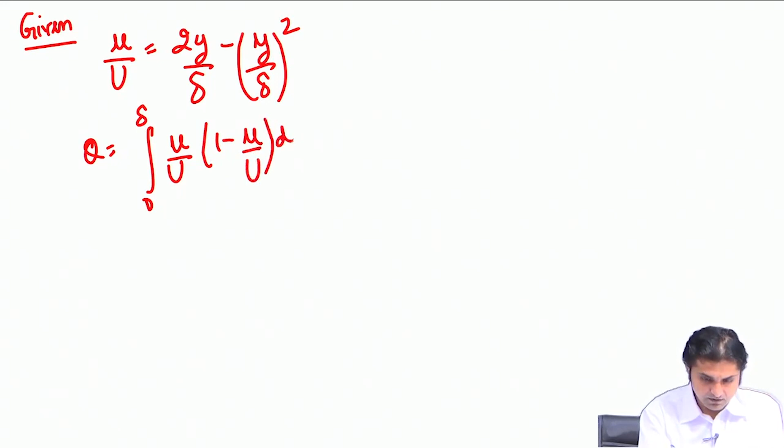So what is given is u by capital U equals 2y by delta minus y by delta whole square. Therefore, the momentum thickness can be written as the integral from 0 to delta of u by capital U times 1 minus u by capital U dy. This is the definition of momentum thickness.

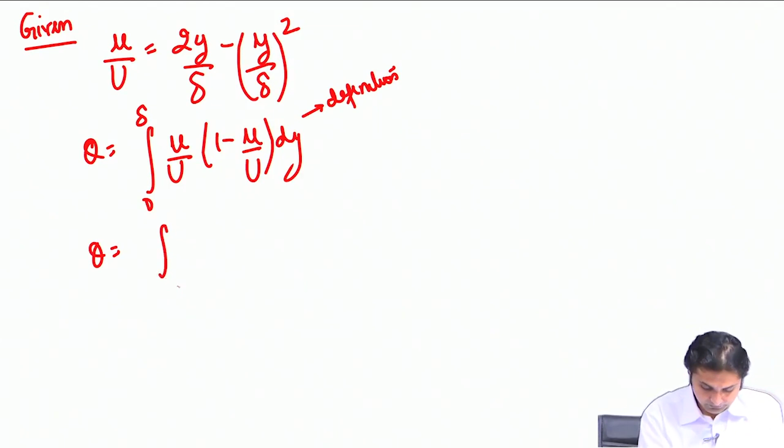So it becomes 2y by delta minus y square by delta square, into 1 minus 2y by delta plus y square by delta square, dy. The momentum thickness is the integral from 0 to delta of 2y by delta minus y square by delta square minus 4y square by delta square minus y to the power 4 by delta to the power 4 plus 4y cube by delta cube, dy.

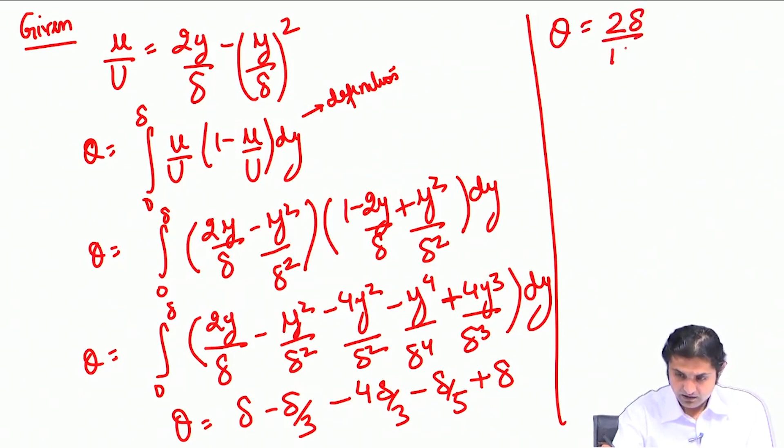After integration and substituting the limits, the first term gives delta minus delta by 3, minus 4 delta by 3 minus delta by 5, and the last term gives delta. Therefore theta, the momentum thickness, is equal to 2 delta by 15.

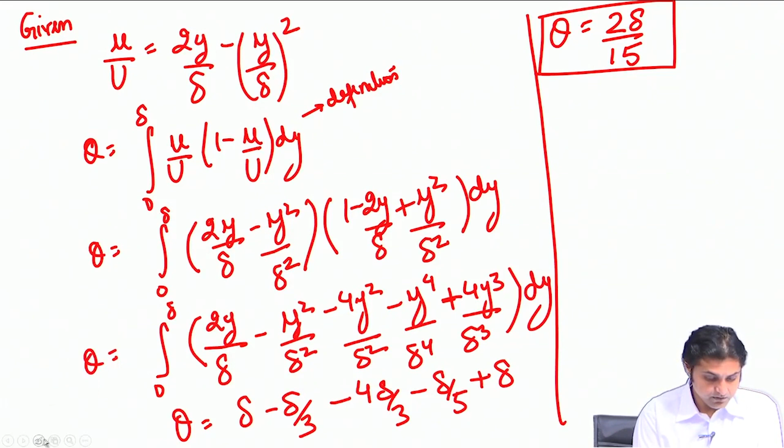We proceed to the next page to solve further. We had got theta equal to 2 delta by 15.

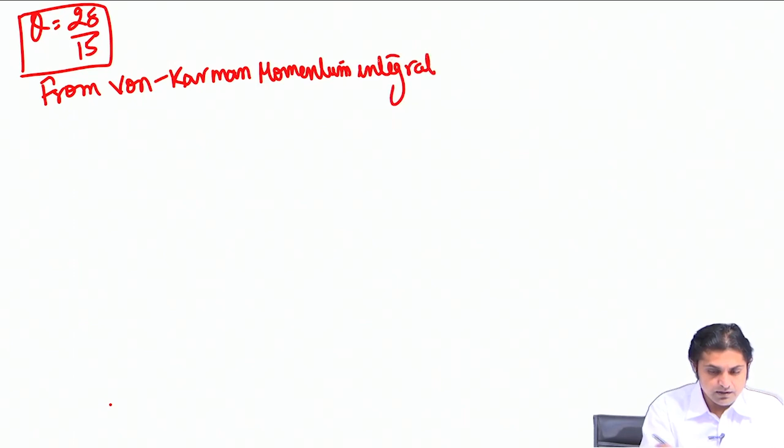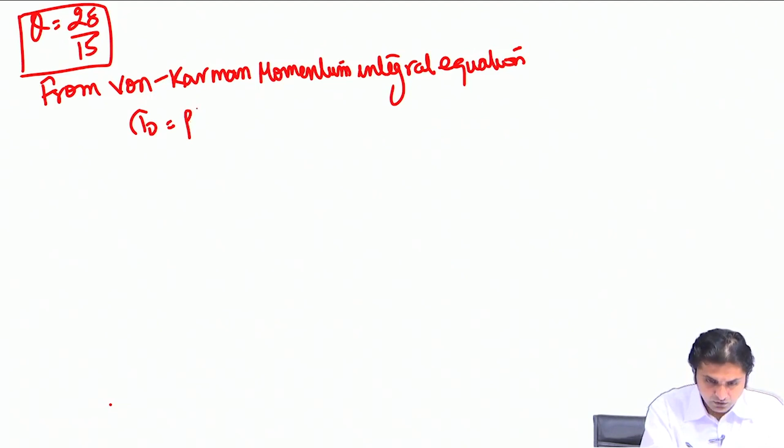Now from the von Karman momentum integral equation, tau naught is equal to rho capital U square d theta by dx.

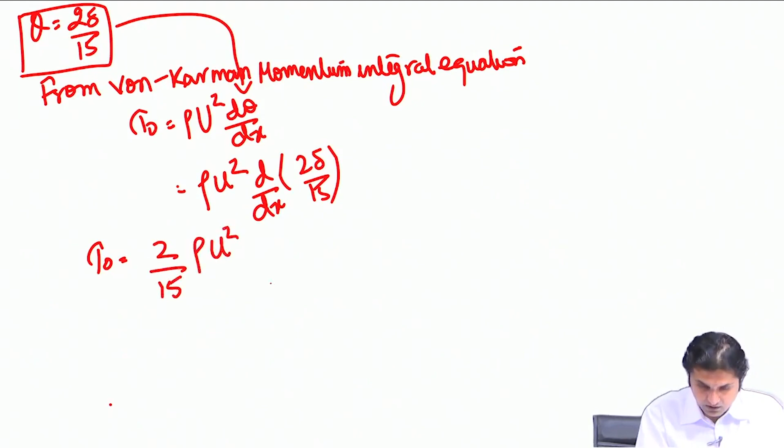So we have rho U square, and we put theta as 2 delta by 15. So d dx of 2 delta by 15. Therefore tau naught is equal to 2 by 15 rho U square d delta by dx, and this is equation number 1.

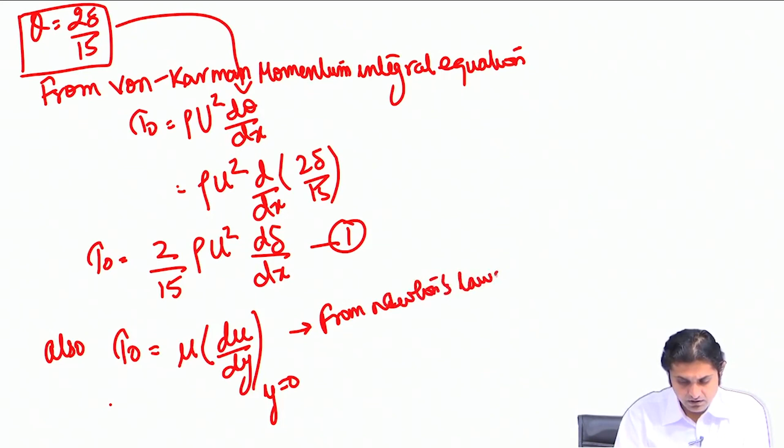Also, tau naught can be written as mu du by dy at y equals 0. How do we get this? From Newton's law of viscosity.

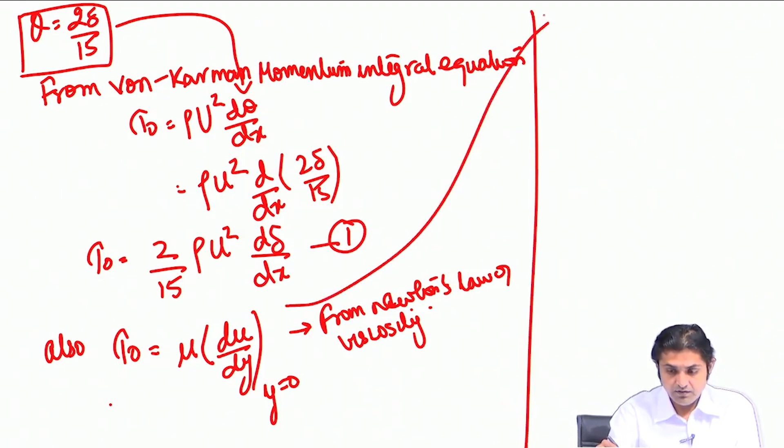The velocity profile we already know, u by capital U given in terms of y and delta. From here, tau naught can be written as mu times du by dy, which becomes 2 capital U by delta minus 2U by delta square into y, at y equals 0. The second term goes away when we substitute, so it becomes mu times 2U by delta. This is equation number 2.

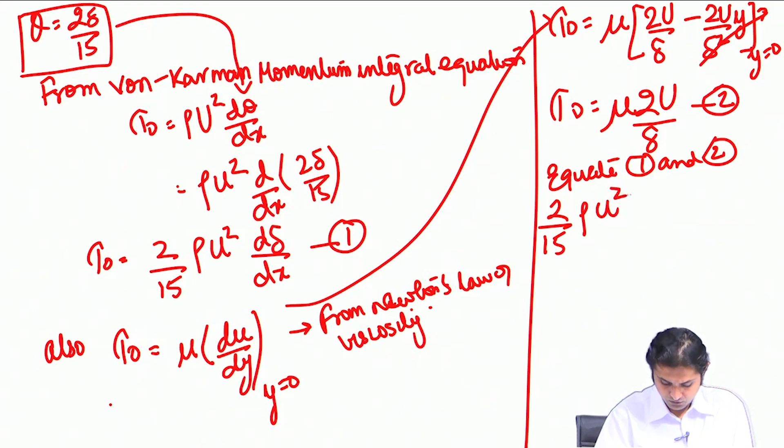Equate equations 1 and 2: 2 by 15 rho U square d delta by dx is equal to 2 mu U by delta. This is the equation that we get.

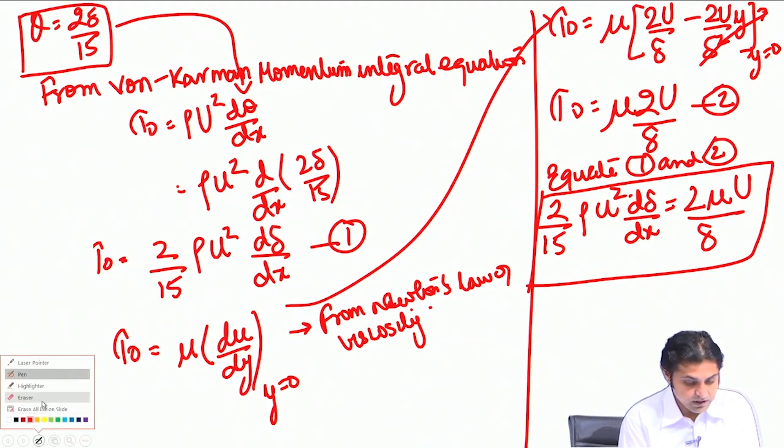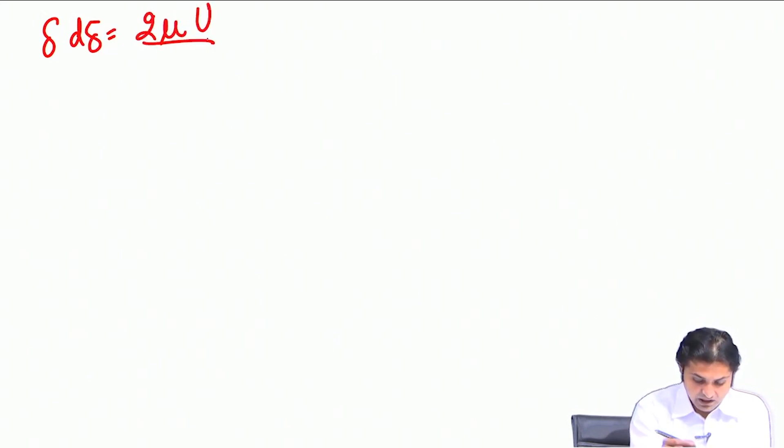Now to find delta, we must simply integrate it. We will do this integration on the next page. It goes like delta d delta equals 2 mu U, divided by 2 by 15 rho capital U square dx. Rearranging, this becomes delta d delta equals, and one U gets cancelled.

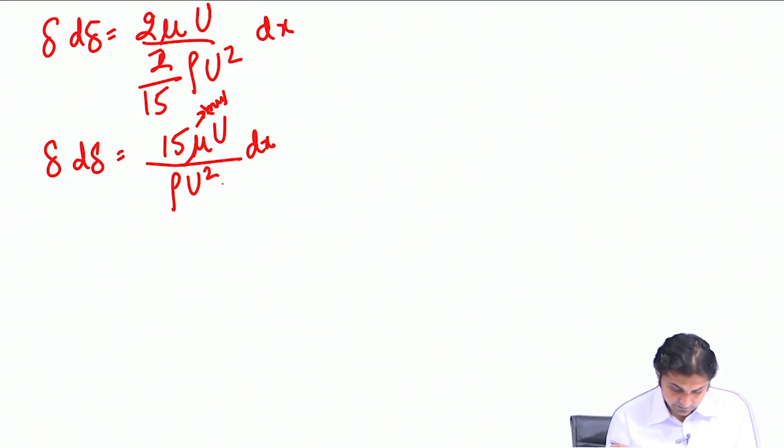This is mu, this is mu, into rho U square dx. So d delta, with U cancelled, becomes 15 mu by rho capital U dx, and then we can integrate.

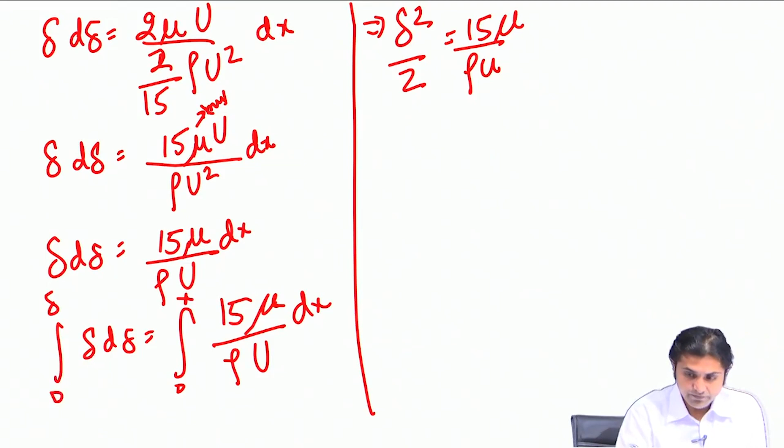We integrate delta from 0 to delta, and x from 0 to x: 15 mu divided by rho capital U dx. After integrating, it becomes delta square by 2 equals 15 mu divided by rho U times x plus c, where c is the constant of integration.

But how do we obtain c? We know that the boundary layer thickness at the leading edge is always 0. So at the leading edge, x is 0 and delta is also 0. Substituting this into the equation, we get c equal to 0.

Therefore, we can simply say the boundary layer thickness: delta square by 2 is equal to 15 mu times x by rho U.

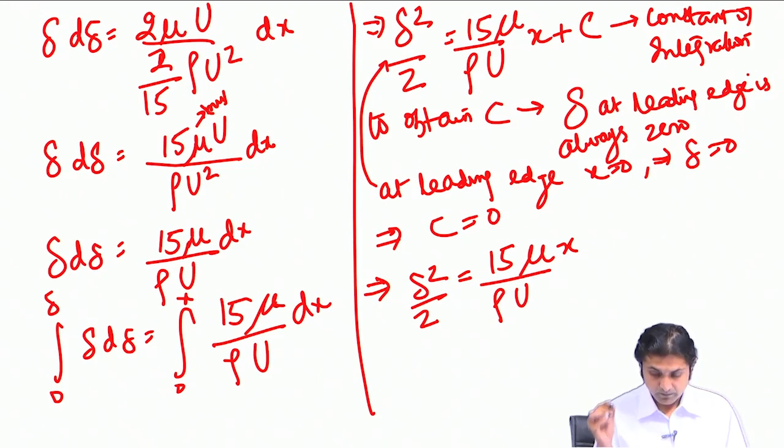To simplify, the left hand side will remain the same. If you divide mu by rho, this becomes nu. Multiply with x on numerator and denominator, and this term is written as the Reynolds number at a distance x.

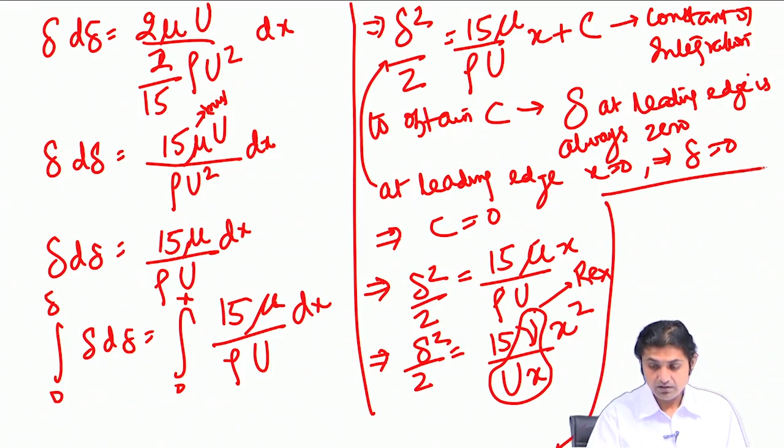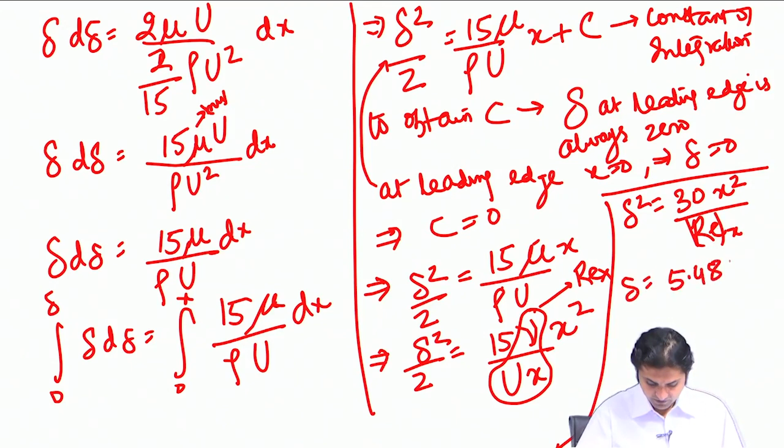So I will conclude here. Delta square can be written as, taking 2 to this side, 30x square divided by Re x. Or, taking the under root, 30 becomes 5.48x divided by under root of Re x.

So this is our first answer, the boundary layer thickness. Now for the second part, I will erase all the ink.

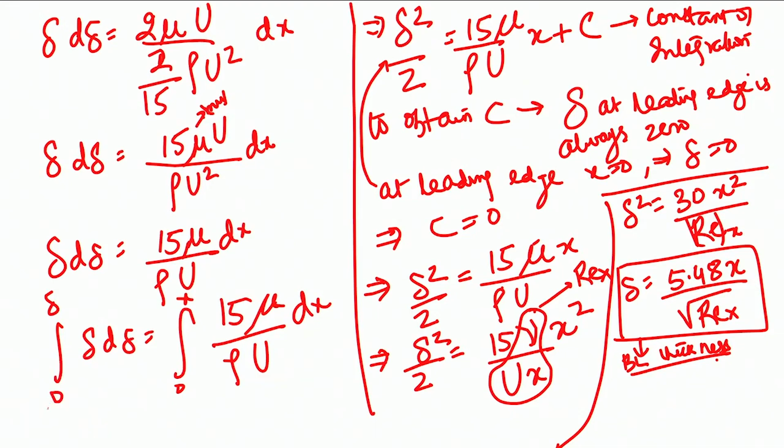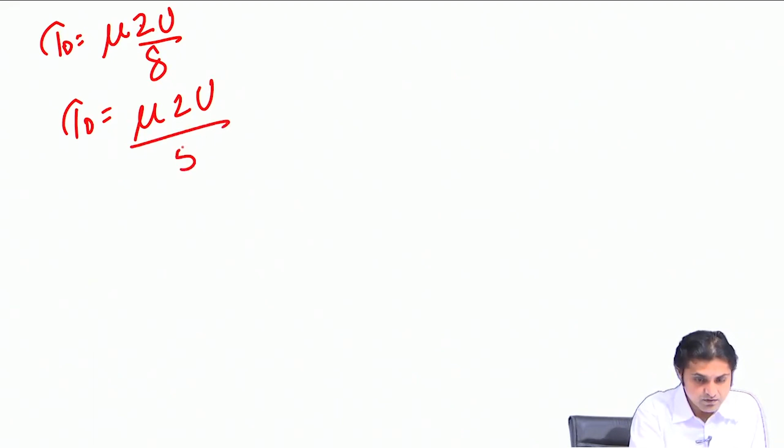For the second part, we know that tau equals mu times 2U by delta. It's just a matter of substitution. Tau naught equals mu times 2 capital U over delta, where delta is 5.48x under root Re x. So tau naught comes out to be 0.365 mu capital U by x under root Re x.

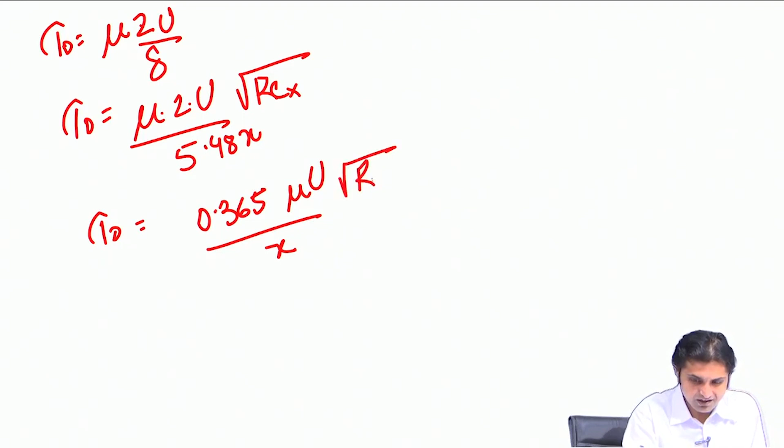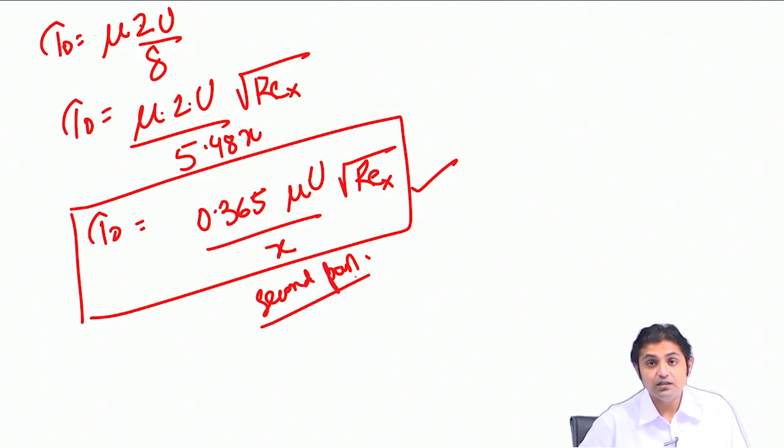After finding that, you can express it in any form you want. So this is the second part. It was a long question, but it clearly showed how we can use the von Karman momentum integral equation to find the boundary layer thickness. Good.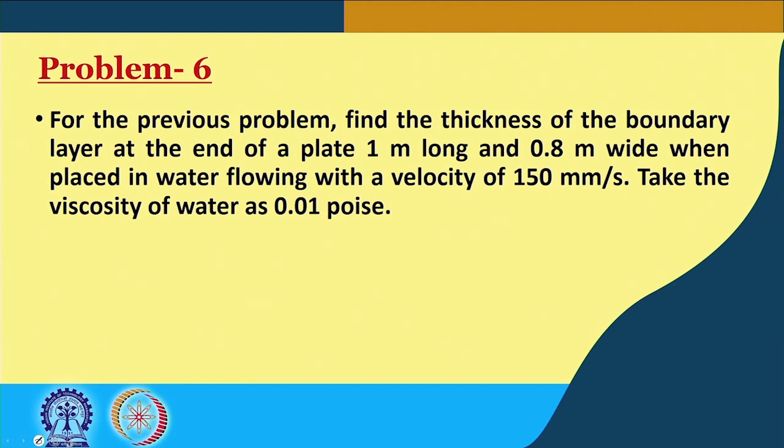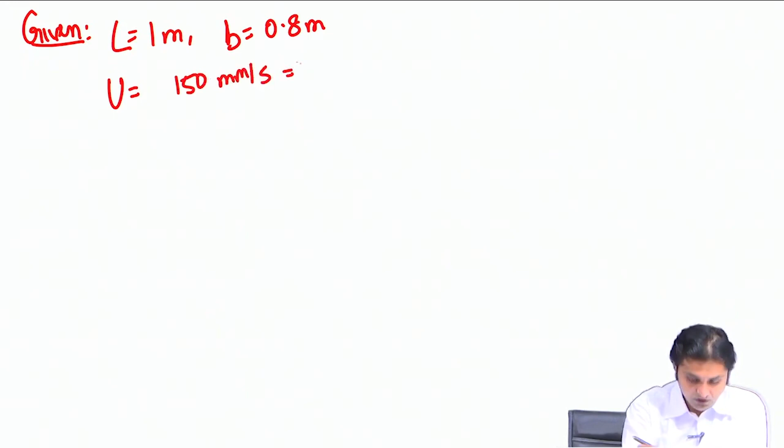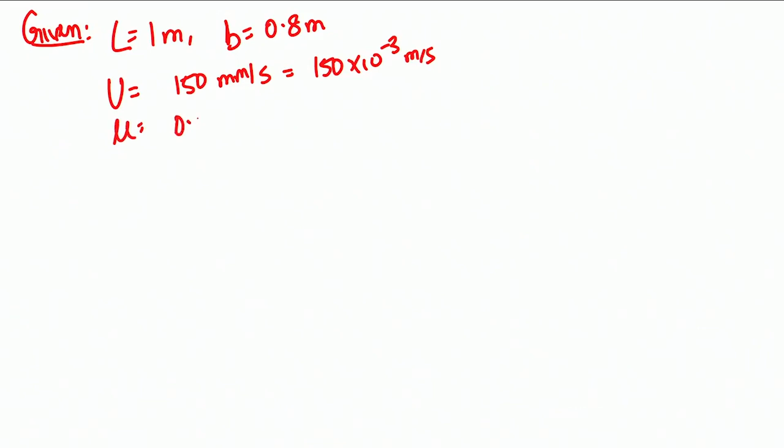To solve this, we go to the white screen again and write the given data. Length is 1 meter, B is 0.8 meter, capital U is 150 millimeters per second, or 150 into 10 to the power minus 3 meters per second. Mu is given as 0.01 poise, or in SI units, 0.001 newton second per meter square.

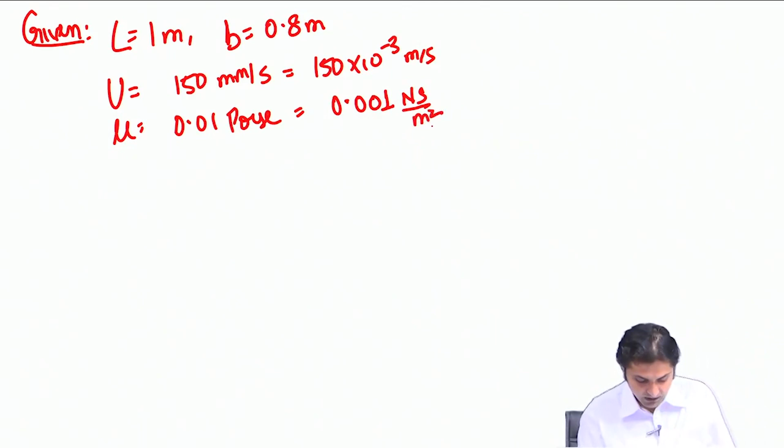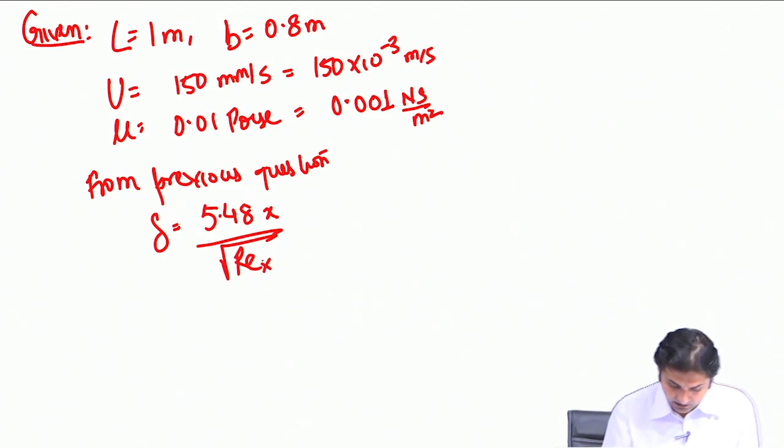So from the previous question we found delta equals 5.48x divided by under root of Re at x, the Reynolds number, for laminar boundary layer. Why laminar? Because we used tau equals mu du dy, which applies for laminar boundary layer.

At the end of the plate, x equals 1 meter. So the Reynolds number at this position will be Ux by nu, or rho Ux by mu. 1000 is the density of water, 150 into 10 to the power minus 3 into x which is 1 meter, divided by mu which is 10 to the power minus 3. So the Reynolds number at x comes out to be 1.5 into 10 to the power 5.

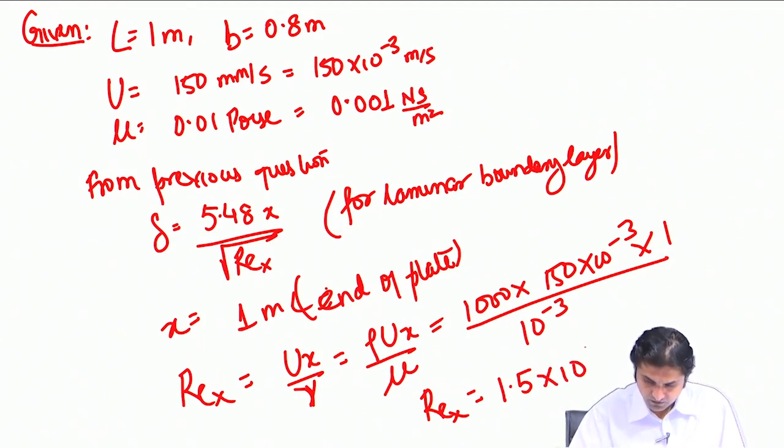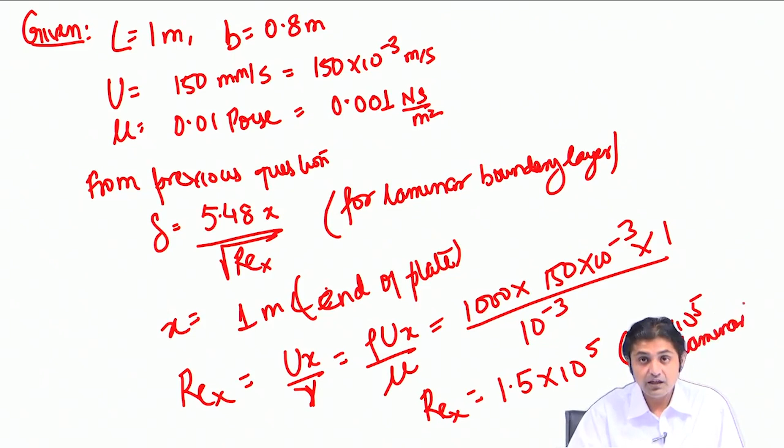And of course it is less than 5 into 10 to the power 5, meaning it is laminar. So our assumption was okay.

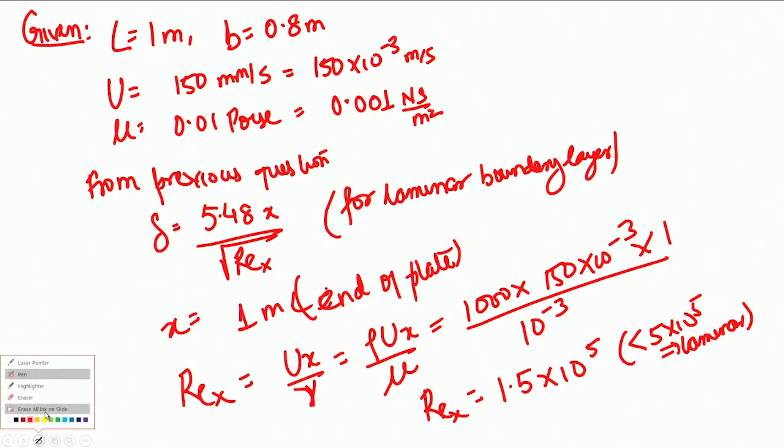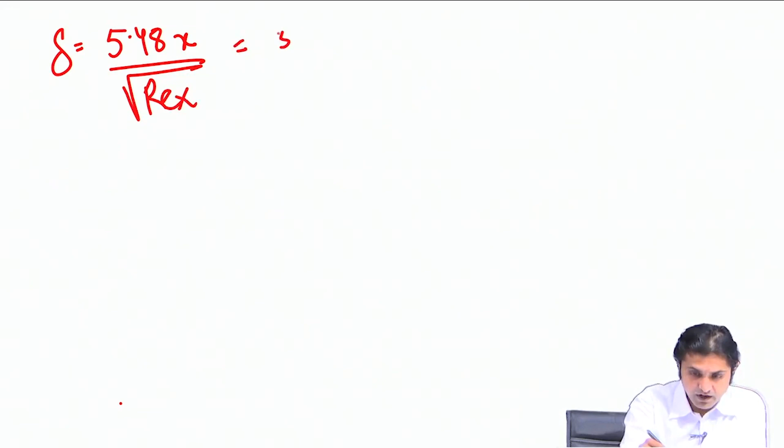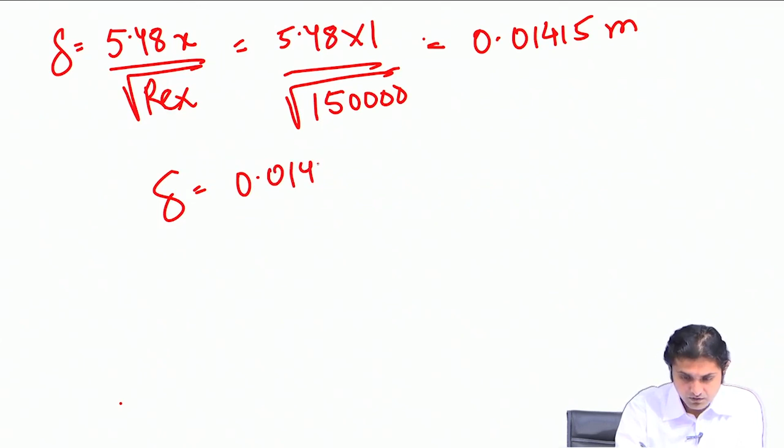So delta by formula is 5.48x divided by under root Re x. So 5.48 into 1 divided by under root of 1.5 into 10 to the power 5, and that comes out to be 0.01415 meters. So the numerical value of boundary layer thickness is 0.01415 meters.

Here we have calculated the boundary layer thickness in terms of numerical values. Good.

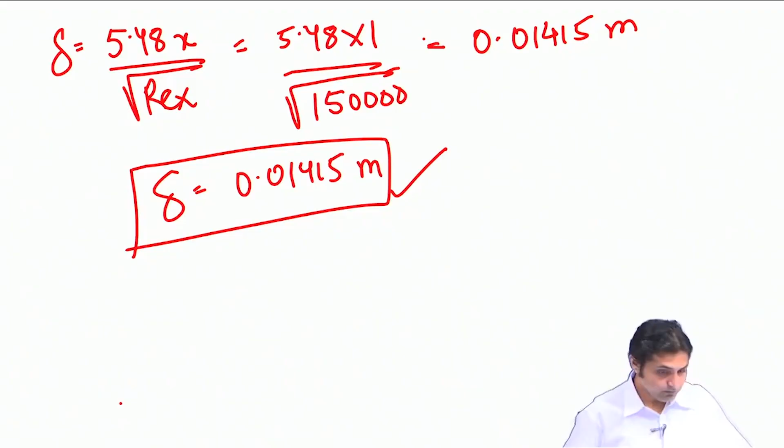Now we will proceed to the next topic. Before solving the problems, we concluded that the equation is valid both for laminar and turbulent boundary layer. So first we study the laminar boundary layer over a flat plate.

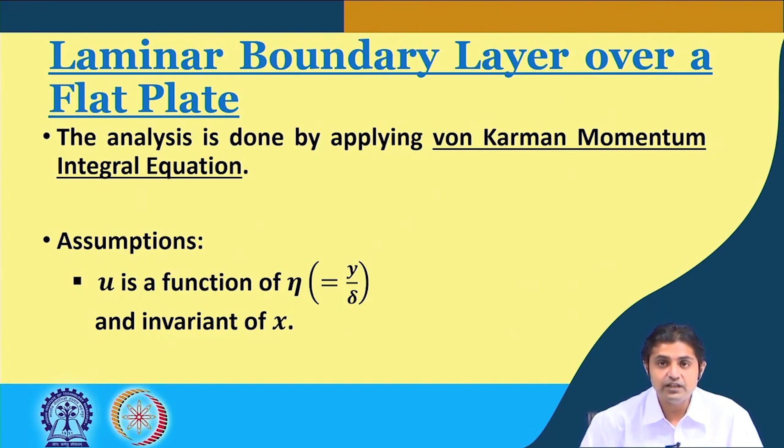This analysis is done by applying the von Karman momentum integral equation, as it is common for both laminar and turbulent flow. The assumption is that u is a function of eta, where eta is y by delta. Y is the distance above the plate and delta is the boundary layer thickness. U is not a function of x, only a function of y, or more precisely, y by delta.

So what we do is we assume that u by capital U is a function of eta, and this is written as a plus b eta plus c eta square plus d eta cube.

So how do we approach this problem? How many terms are there? 4 terms. How many unknowns? A, B, C, D. But fortunately we know that while doing those equations, the von Karman momentum integral equation, we had 4 boundary conditions, if you remember.

I will just briefly take you and show that. So what were those boundary conditions? Very simple boundary conditions. So these were the 4 boundary conditions, if you remember.

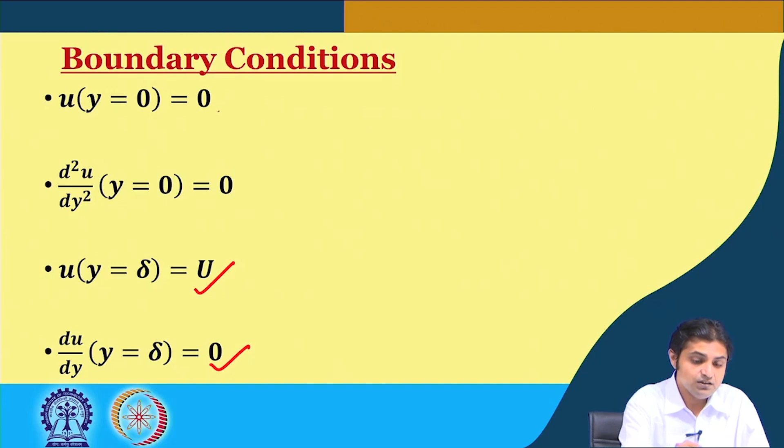U at y is equal to 0 is 0, okay. Del square u by del y square at y is equal to 0 is also 0, and u at y is equal to delta is equal to U, and del u by del y at the boundary layer is 0. The velocity gradient at the top of the boundary layer is 0, there is a free stream velocity, these two are 0. So now we apply this condition also for laminar cases, okay. What we get,

This function is a third order polynomial law. So what we get, if you apply u at y is equal to 0 is 0, which will give us a is equal to 0. So if y is equal to 0, eta is 0, so a plus 0 plus 0 plus 0 is equal to 0.

If you apply the second boundary condition, del square u by del y square, you differentiate this f of eta twice. This will become 0, this will become 0 on twice differentiation. This will give us 2c plus 6d eta is equal to 0. So when eta is equal to 0, this means c is equal to 0. So the first two conditions are going to give us a is equal to c is equal to 0.

Substituting the third and fourth condition: the third one, where we have to differentiate once, will give us this condition. You can try this at home, and the fourth condition will give us d is equal to minus half. So those four boundary conditions are used to solve for these values of a, b, c and d.

Therefore, we can simply write that u by capital U, which is the free stream velocity, is given by 3 by 2 eta minus half eta cube.

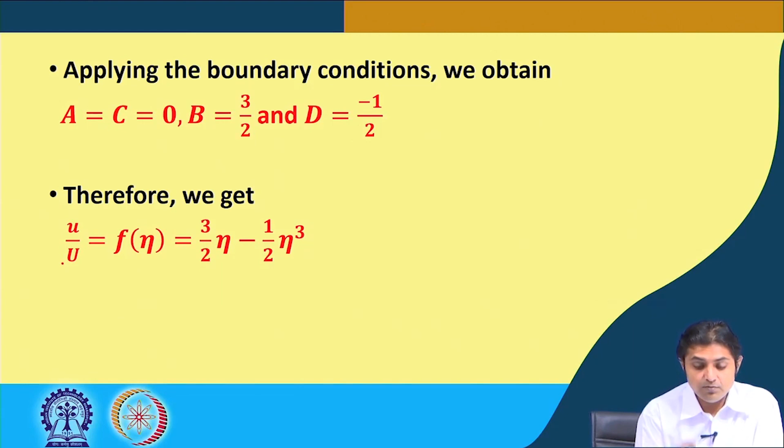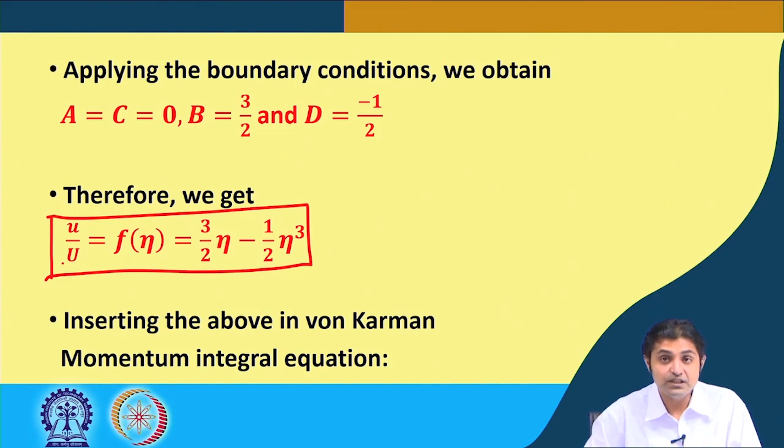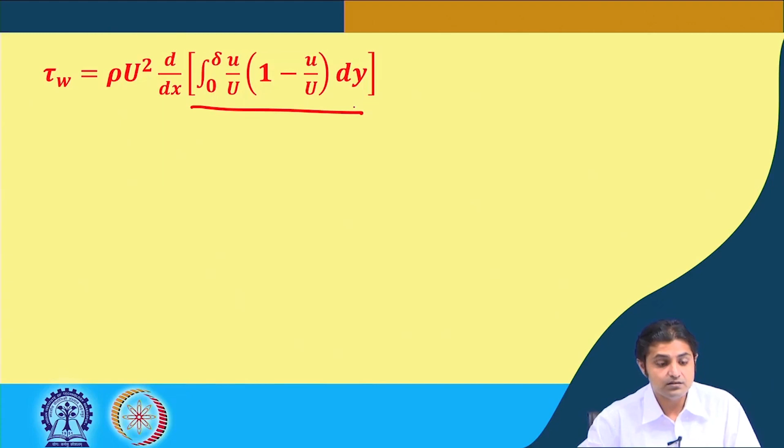Now, if we insert the above in the von Karman momentum integral equation, what do we get? So tau w is written as rho U square d/dx of this, which is the momentum thickness, theta, or in other words, the integral of f into 1 minus f d eta, because if eta is equal to y by delta, then d eta is equal to dy by delta.

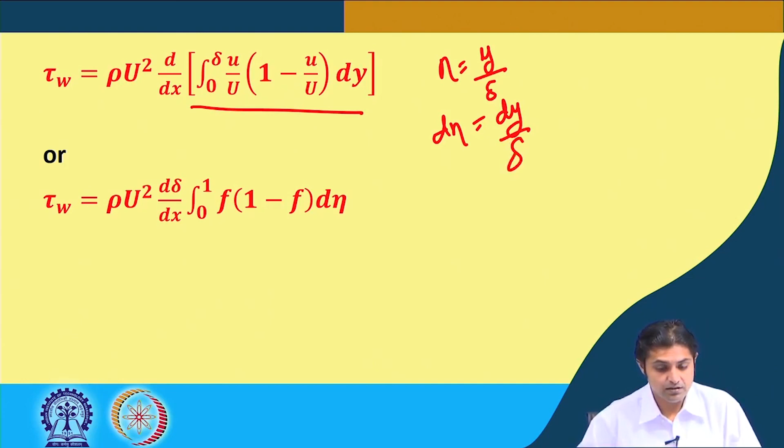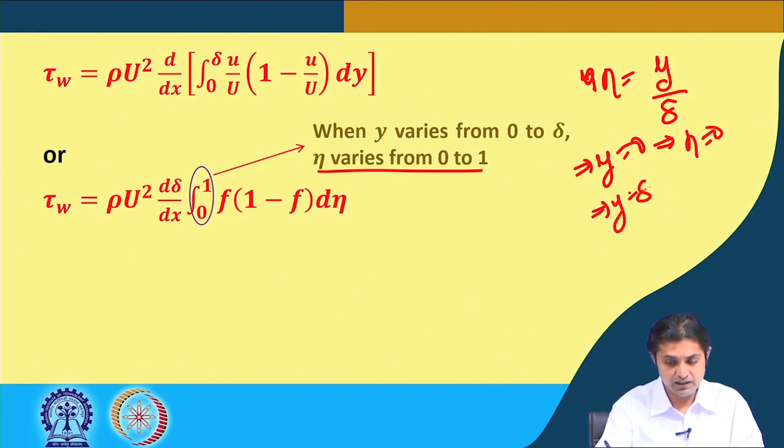So now the limits will change, because when y varies from 0 to delta, eta can vary from 0 to 1, right. So eta is y by delta; when y is equal to 0, eta is equal to 0, and when y is equal to delta, eta is equal to 1. So these limits will change, as shown.

Or in other terms, what we can write is, on integration and converting it into the form of delta, this will give us tau w equals 0.139 rho U square, with rho U square remaining as is. This value comes out to be 0.139, you can see that here, okay.

Now, if we apply Newton's law of viscosity at the boundary, why can we apply Newton's law of viscosity? Because it is a laminar flow, okay. We did the same thing when we were solving the numerical problems.

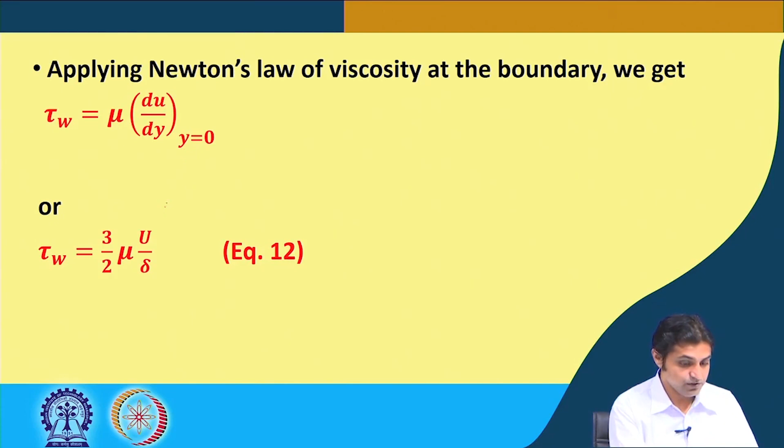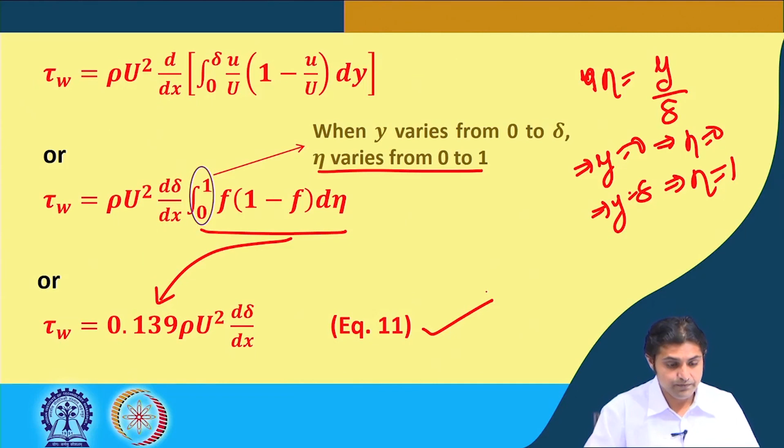Or if you see du/dy at y is equal to 0, this is going to give us 3 by 2 mu into U by delta, okay. So what do we do next? One way we have obtained Newton's law of viscosity, and the other equation was equation number 11 here, because what we started with was the velocity profile here, all right.

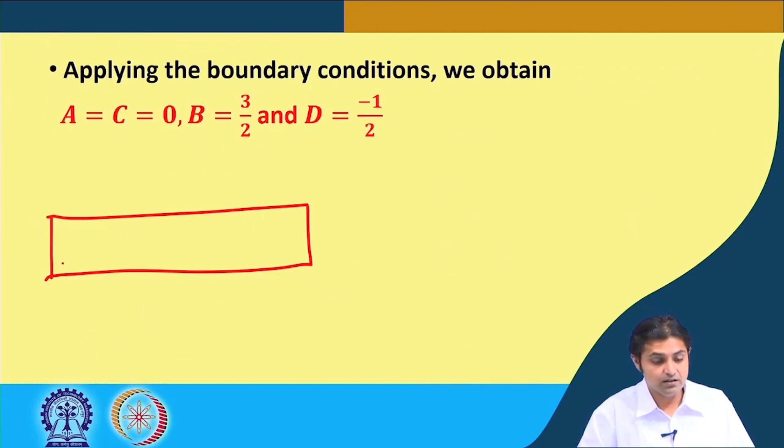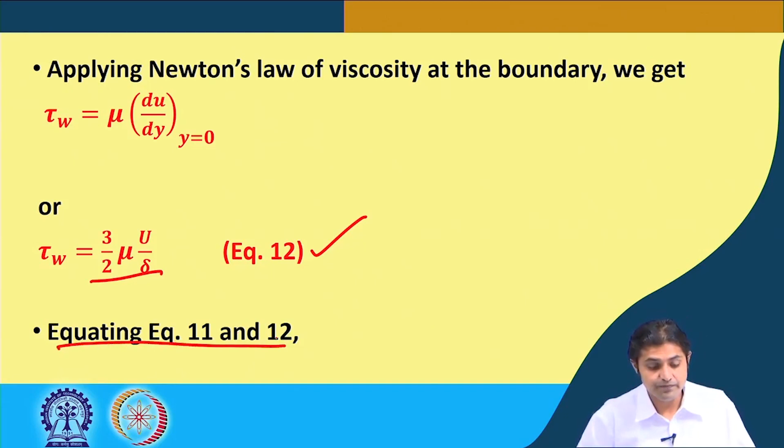u by capital U is equal to a plus b eta plus c eta square plus d eta cube, and differentiating that we got this. We equate equation 11 and equation 12, which gives us delta d delta equal to 10.79 nu by U dx, and if we integrate this equation, we can get the boundary layer thickness.

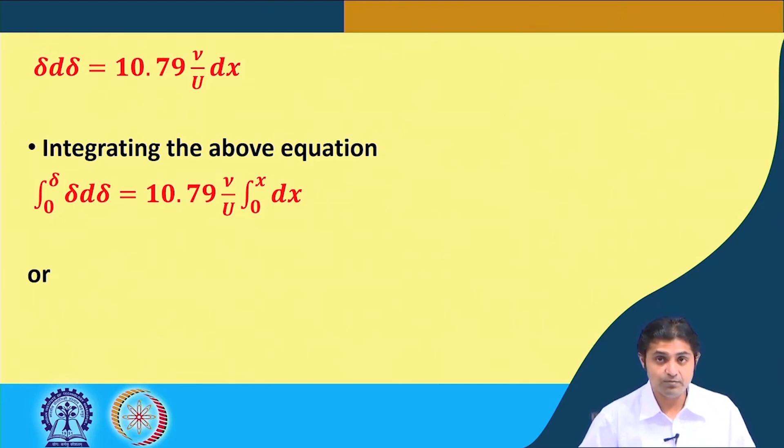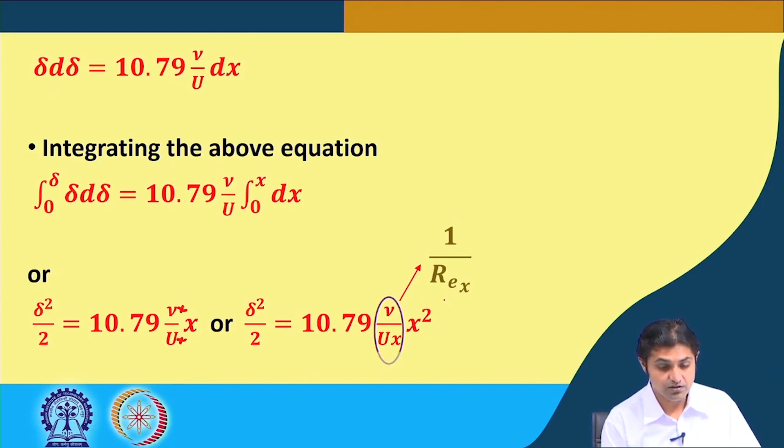So what we did was we multiplied x and x upstairs and in the denominator also. So this becomes x square, and this is the Reynolds number, this is exactly what we did. In other words, we get delta is equal to 4.64x under root Reynolds number of x.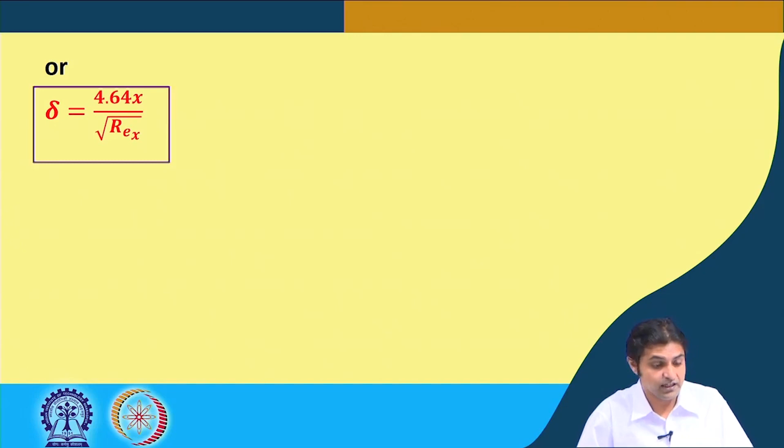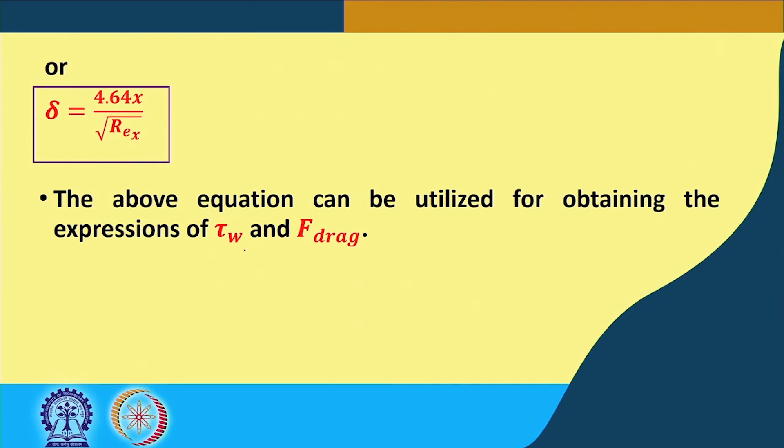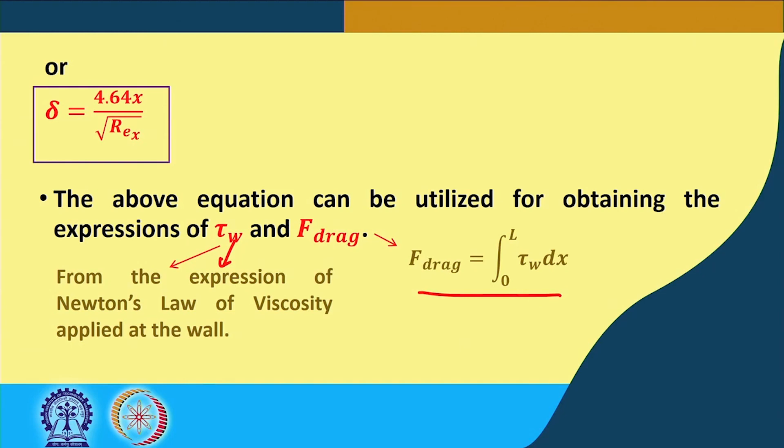Try to remember the equation we just finished at the beginning of this lecture. The above equation can be utilized for obtaining expressions for tau w and drag force, because we get the boundary layer thickness. From the expression of Newton's law of viscosity, we can obtain tau w, and for drag force we simply integrate tau w from 0 to L over the entire plate. This is the way it is done.

Now we will solve one problem. The problem is: for the velocity profile for laminar boundary layer, u by capital U is equal to 3 by 2 y by delta minus half y by delta to the whole cube, determine the shear stress and the drag force in terms of Reynolds number. We have done a similar problem, but we will do another one now to make it more clear.

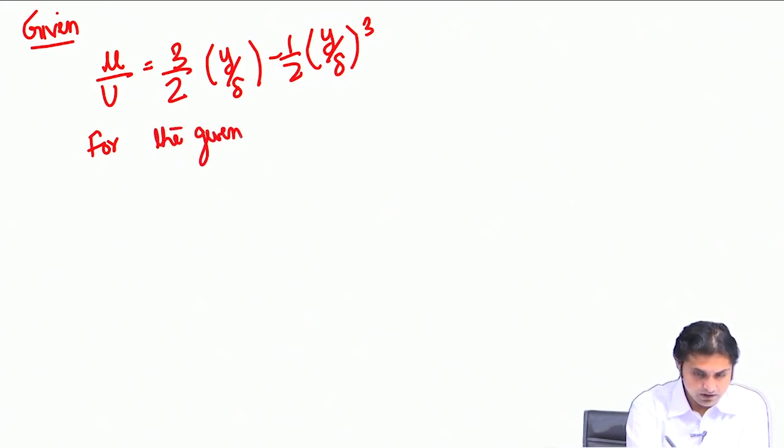So first write what is given to us: u by capital U is equal to 3 by 2 y by delta minus half y by delta to the whole cube, for the given velocity profile.

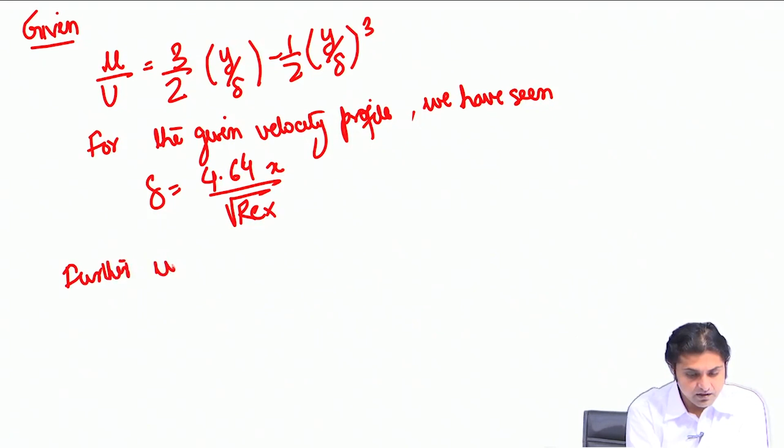We have seen that delta came out to be 4.64x under root Reynolds number at x. This was the last derivation that we saw. Further, we have seen tau naught is equal to mu du by dy at y is equal to 0, correct.

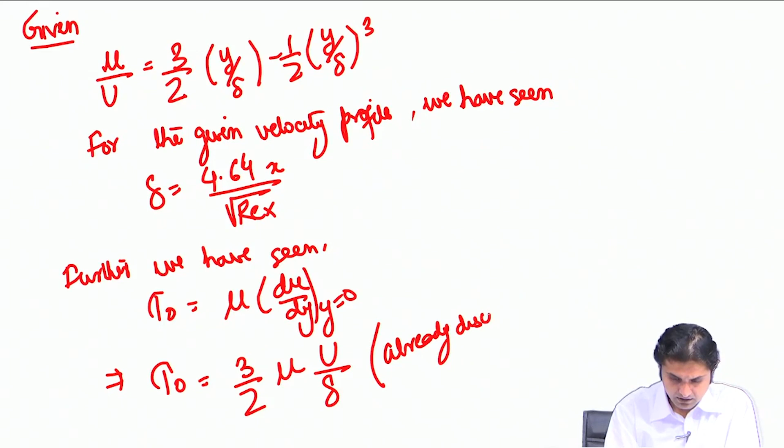This implies tau naught is equal to 3 by 2 mu capital U by delta. This has already been discussed, right. So delta we know from here.

So tau naught equals 3 by 2 mu U under root Rex divided by 4.64 x, or finally tau naught can be written as 0.323 mu capital U by x under root Rex.

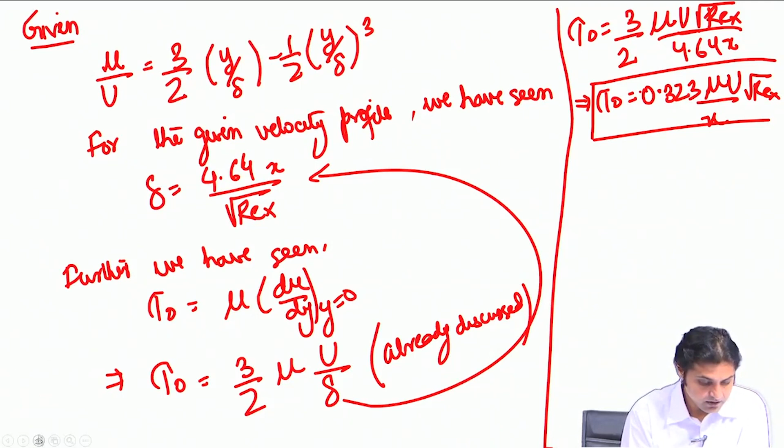Now, the second part is how do we find the drag force? Very simple, we have laid down the procedure. So, drag force...

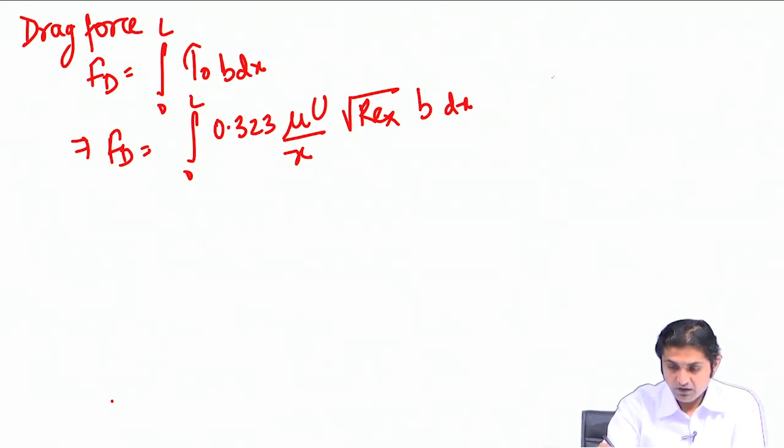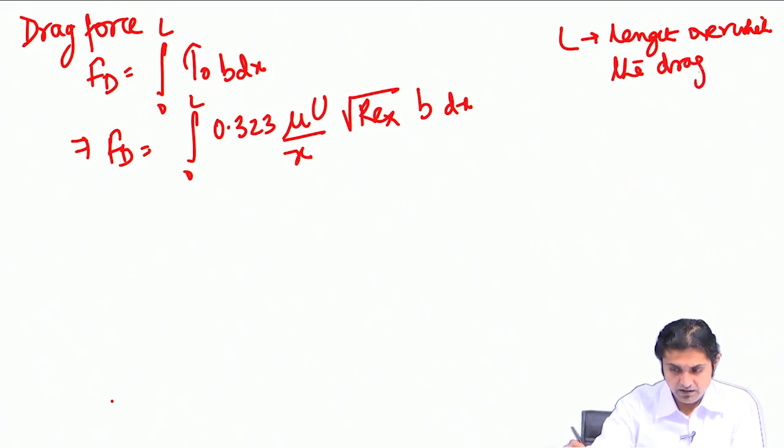Fd can be found using the integral from 0 to L of tau naught b dx, which implies drag force Fd is equal to the integral from 0 to L of 0.323 mu U by x under root Rex, b dx. Here L is the length over which the drag is intended to be found.

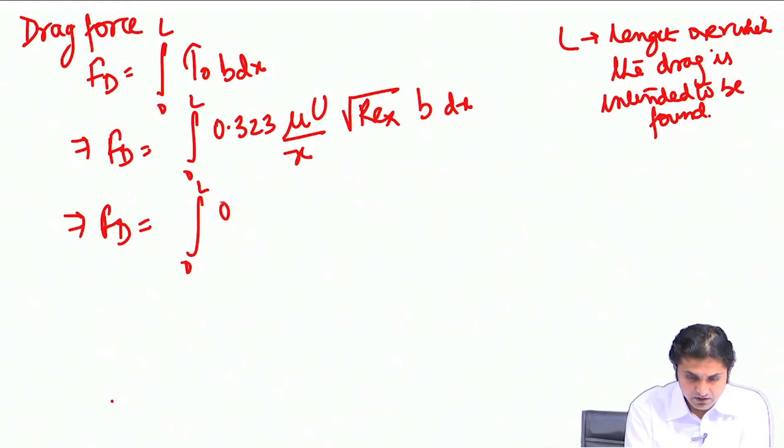So this implies drag force equals the integral from 0 to L of 0.323 mu U b by x times rho ux by mu to the power half, dx.

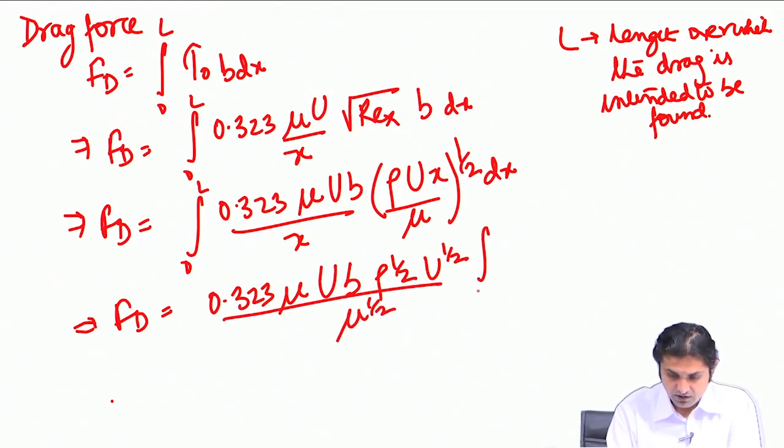So this implies Fd can be written, after integration, as 0.323 mu capital U b, with rho to the power half coming out, capital U to the power half coming out, mu to the power half coming out, times the integral from 0 to L of x to the power minus half dx.

So after integrating and substituting the values of x from 0 to L, Fd will be 0.323 into 2 into mu capital U b, into under root of rho U L by mu. So this is the drag force.

More importantly, it is the way that it has to be found. In your questions, you will mostly be given an objective question, and if you know the way to find it, the calculation will not be so tedious.